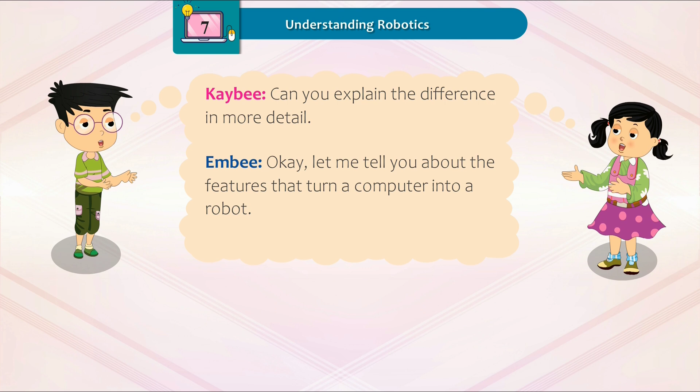In today's world, technology gives us numerous opportunities to shape our lives in various ways that lead to comfort, convenience, and efficiency. The concept of robots comes into the picture when we start using the power of technology to replace humans, especially for routine and difficult tasks. A robot is a mechanical device that is controlled by computer programs to carry out various functions. So a robot is an automated device that functions much like humans.

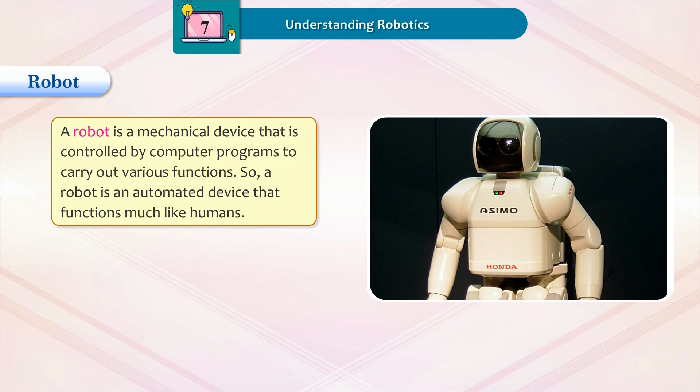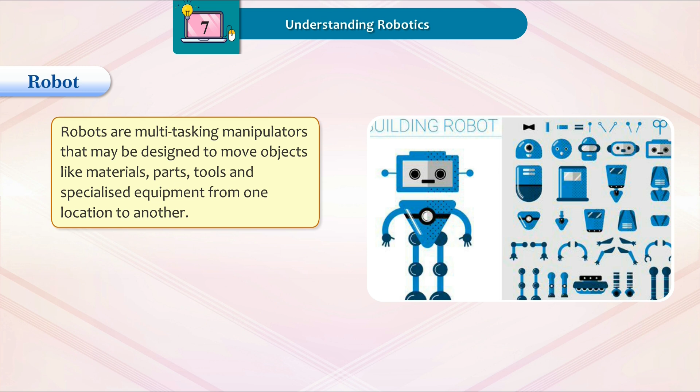Robots are multitasking manipulators that may be designed to move objects like materials, parts, tools, and specialized equipment from one location to another. Robots are machines that can be used to do jobs. Each robot has a different level of autonomy. Some robots can do work by themselves; other robots always need to be controlled by humans.

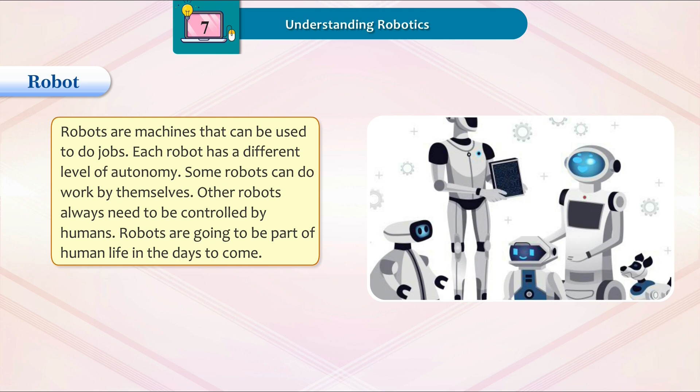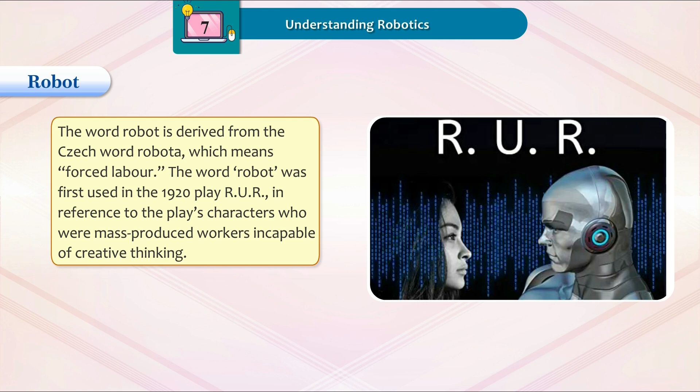Robots are going to be part of human life in the days to come. The word robot is derived from the Czech word robota, which means forced labor. The word robot was first used in the 1920 play R.U.R., in reference to the play's characters who were mass-produced workers incapable of creative thinking.

Smart Connect: The father of robotics is said to be Ismail al-Jazari.

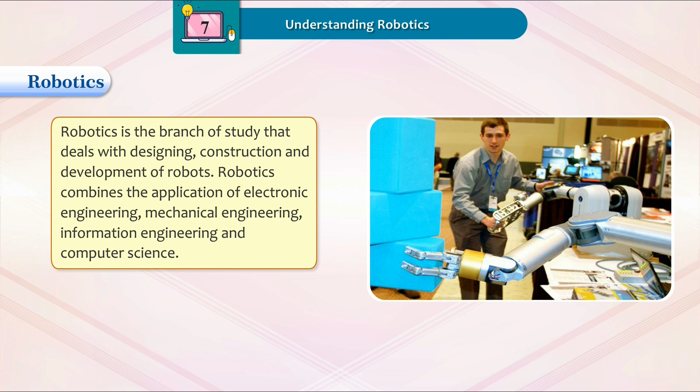Robotics is the branch of study that deals with designing, construction, and development of robots. Robotics combines the application of electronic engineering, mechanical engineering, information engineering, and computer science. Robotics is STEM, that is a combined application of science, technology, engineering, and mathematics.

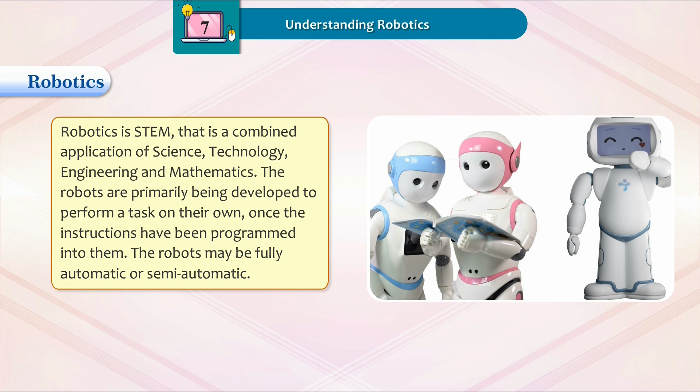The robots are primarily being developed to perform a task on their own. Once the instructions have been programmed into them, the robots may be fully automatic or semi-automatic.

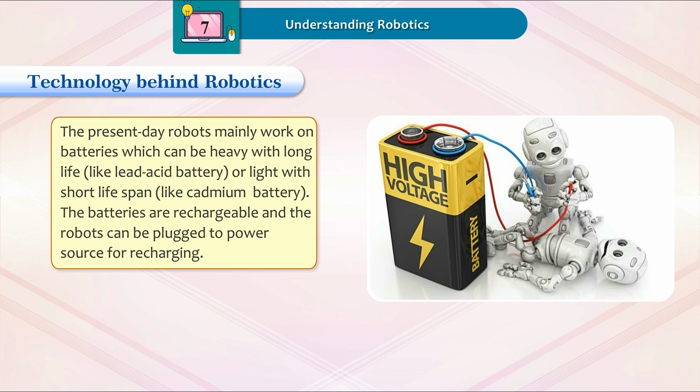Technology behind robotics: The present-day robots mainly work on batteries which can be heavy with long life, like lead-acid battery, or light with short lifespan, like cadmium battery. The batteries are rechargeable and the robots can be plugged to a power source for recharging.

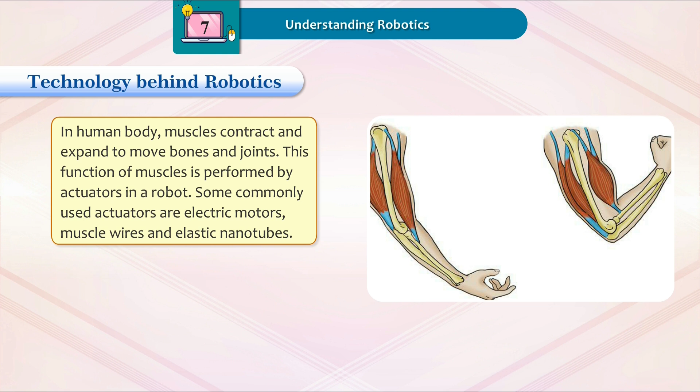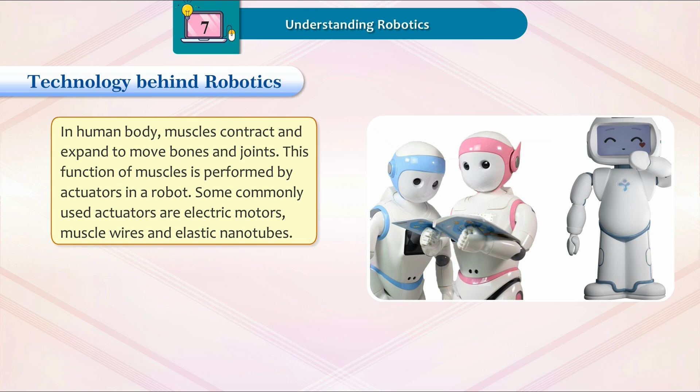In the human body, muscles contract and expand to move bones and joints. This function of muscles is performed by actuators in a robot. Some commonly used actuators are electric motors, muscle wires, and elastic nanotubes.

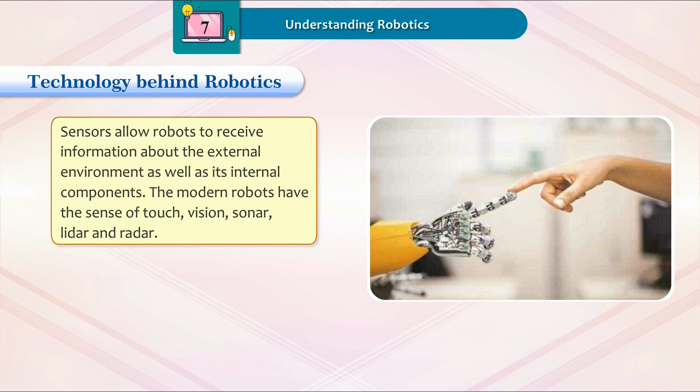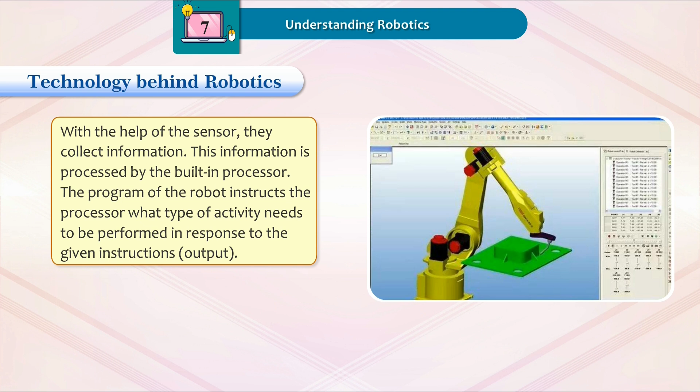Sensors allow robots to receive information about the external environment as well as its internal components. The modern robots have the sense of touch, vision, sonar, lidar, and radar. With the help of the sensor, they collect information. This information is processed by the built-in processor. The program of the robot instructs the processor what type of activity needs to be performed in response to the given instructions or output.

Applications of robotics: Presently, the robots are being developed to perform a specific set of activities. As a result, various customized robots have been developed.

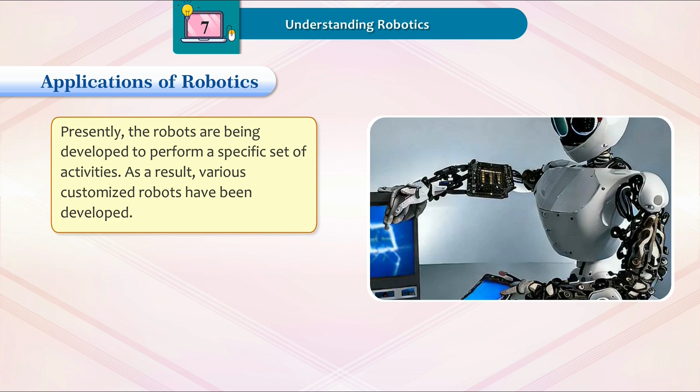Robotics in medicine: In medicine, the robots are used for various activities. Surgical robots are used for performing complex surgeries controlled by a surgeon. Companion robots are used for providing nursing facilities to patients. Disinfection robots are used for disinfecting a particular area using ultraviolet light in a short time, particularly to combat with microbes like the Ebola virus, etc.

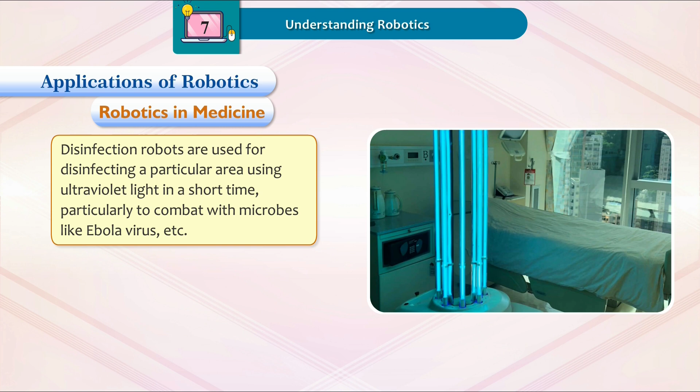Robotics in automobile manufacture: In the automotive industry, the robots are used for assembling various parts of an automobile. They reduce the use of human labor and can lift and move heavy parts with ease.

Robotics in banking: The robots are used for automation of various banking processes, document compliance, and reviewing financial documents.

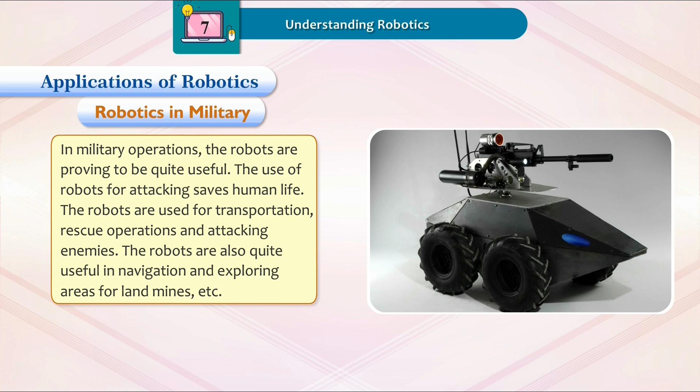Robotics in military: In military operations, the robots are proving to be quite useful. The use of robots for attacking saves human life. The robots are used for transportation, rescue operations, and attacking enemies. The robots are also quite useful in navigation and exploring areas for landmines, etc.

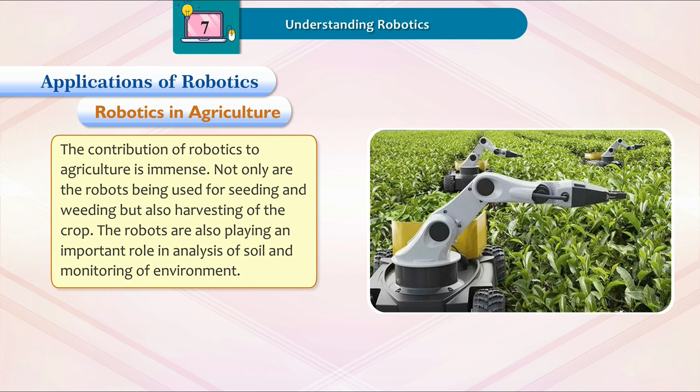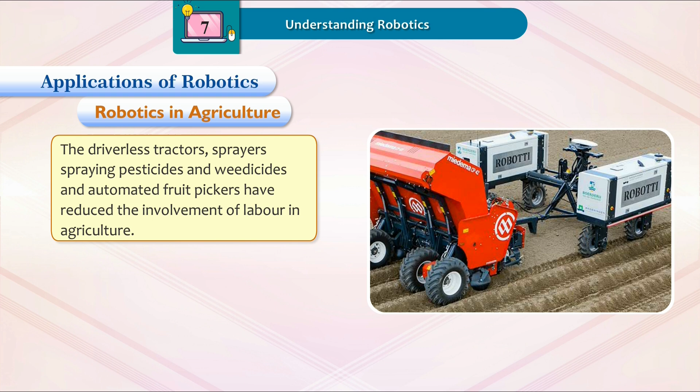Robotics in agriculture: The contribution of robotics to agriculture is immense. Not only are the robots being used for seeding and weeding, but also harvesting of the crop. The robots are also playing an important role in analysis of soil and monitoring of environment. The driverless tractors, sprayers spraying pesticides and weedicides, and automated fruit pickers have reduced the involvement of labor in agriculture.

Robotics in teaching: The robots are also replacing human teachers due to their advanced calculating and analyzing skills, as well as the huge data that can be stored in their memory.

Smart Connect: The robots that look like humans are called humanoids. Renowned robots: various robots have been developed till date.

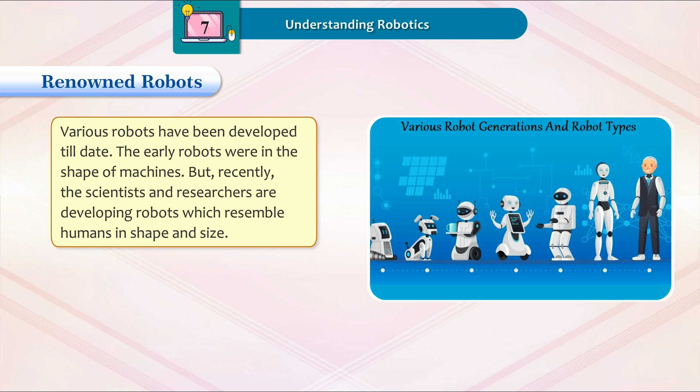The early robots were in the shape of machines, but recently scientists and researchers are developing robots which resemble humans in shape and size. Some robots that have gained immense popularity are WooWee CHiP.

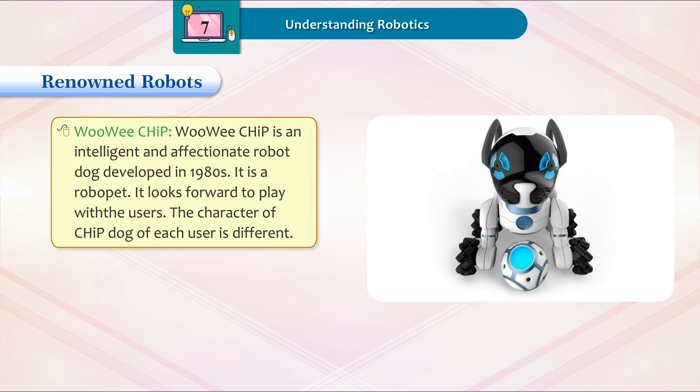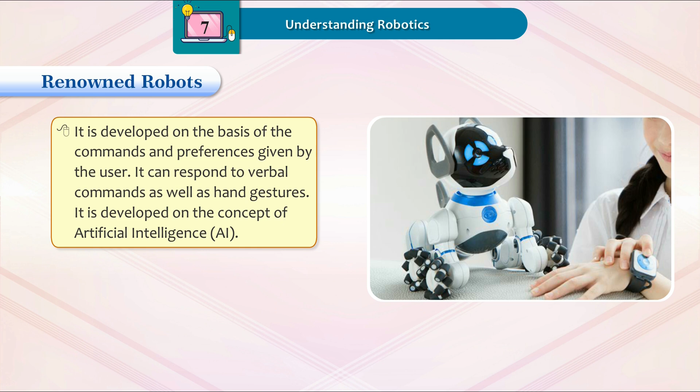WooWee CHiP is an intelligent and affectionate robot dog developed in the 1980s. It is a robo-pet that looks forward to playing with users. The character of CHiP for each user is different, developed based on the commands and preferences given by the user. It can respond to verbal commands as well as hand gestures, and is developed on the concept of artificial intelligence.

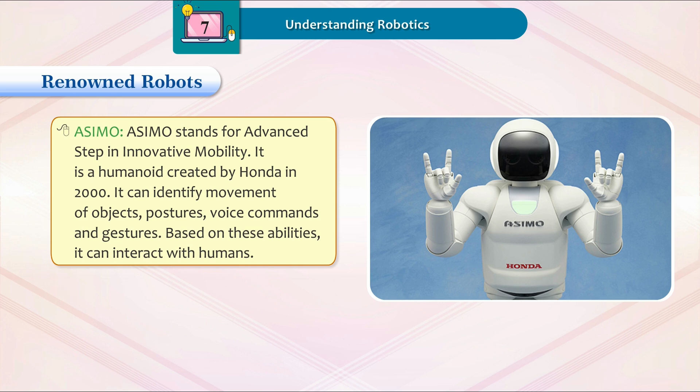ASIMO stands for Advanced Step in Innovative Mobility. It is a humanoid created by Honda in 2000. It can identify movement of objects, postures, voice commands, and gestures, and based on these abilities, it can interact with humans.

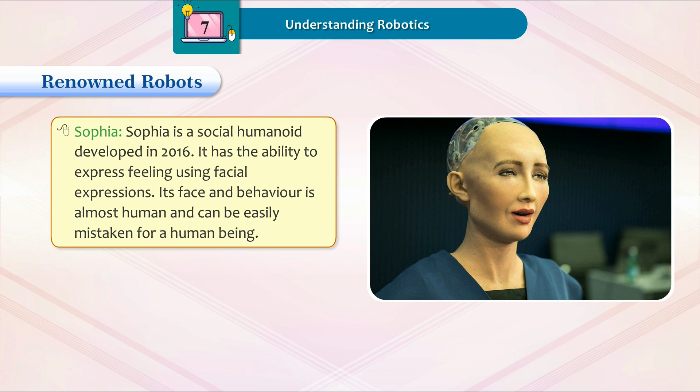Sophia is a social humanoid developed in 2016. It has the ability to express feeling using facial expressions. Its face and behavior is almost human and can be easily mistaken for a human being. Sophia was developed to provide nursing service to the elderly and help manage crowds at parks. It has 9 siblings as well to help it.

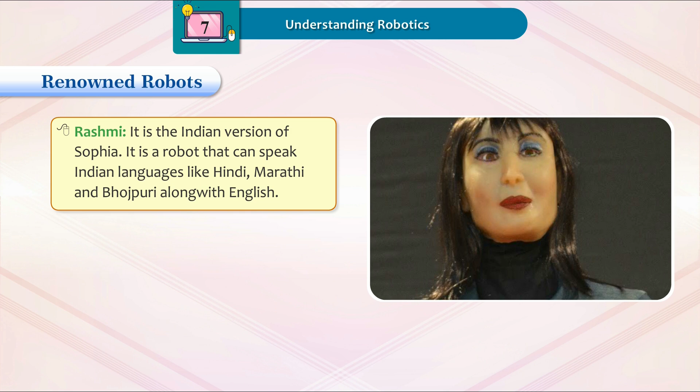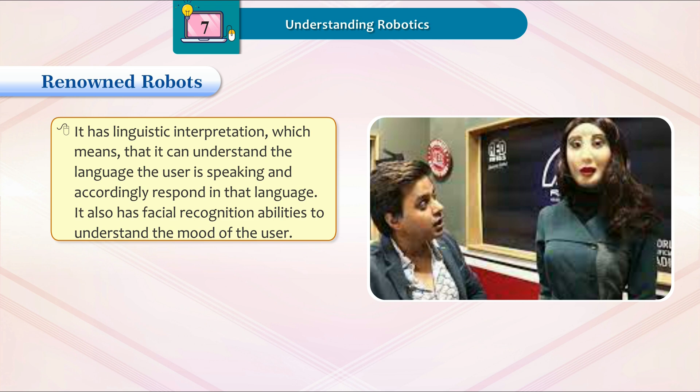Rashmi is the Indian version of Sophia. It is a robot that can speak Indian languages like Hindi, Marathi, and Bhojpuri along with English. It has linguistic interpretation, meaning it can understand the language the user is speaking and respond in that language. It also has facial recognition abilities to understand the mood of the user.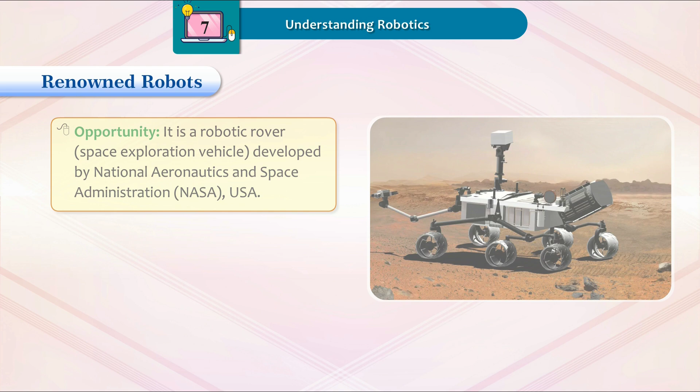Opportunity is a robotic rover space exploration vehicle developed by NASA, USA. NASA sent this rover for exploration of the planet Mars. It actively provided useful information about Mars from 2004 to 2018.

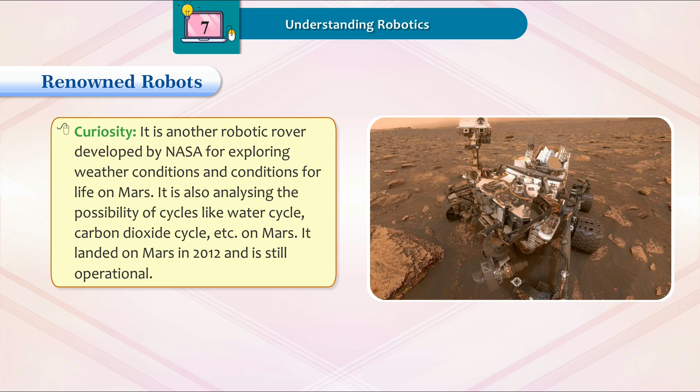Curiosity is another robotic rover developed by NASA for exploring weather conditions and conditions for life on Mars. It is also analyzing the possibility of cycles like the water cycle and carbon dioxide cycle on Mars. It landed on Mars in 2012 and is still operational.

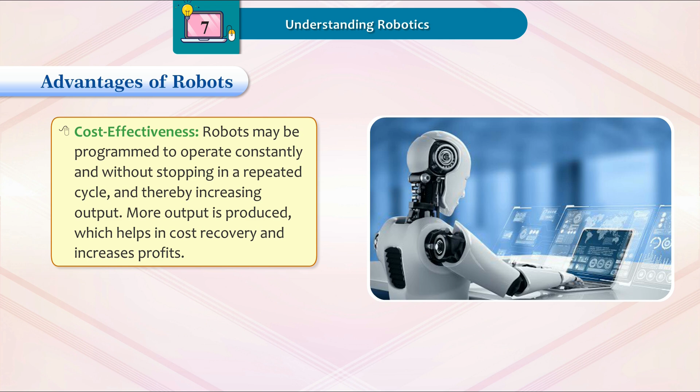Advantages of robots: cost effectiveness. Robots may be programmed to operate constantly and without stopping in a repeated cycle, thereby increasing output. More output is produced, which helps in cost recovery and increases profits.

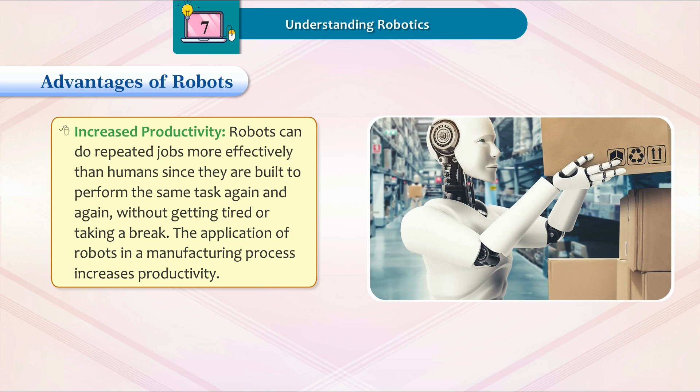Increased productivity. Robots can do repeated jobs more effectively than humans since they are built to perform the same task again and again without getting tired or taking a break. The application of robots in a manufacturing process increases productivity.

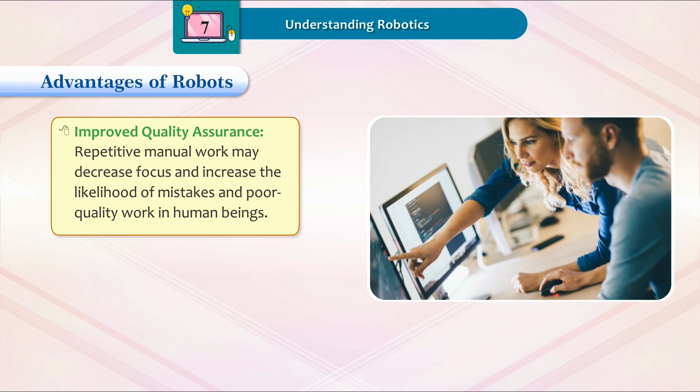Improved quality assurance. Repetitive manual work may decrease focus and increase the likelihood of mistakes and poor quality work in human beings. Robots avoid these risks by manufacturing and inspecting goods by predetermined standards. More precise and consistently high-quality products help businesses grow and expand.

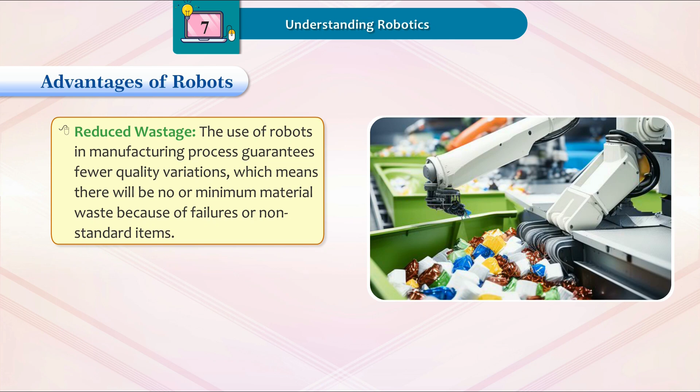Reduced wastage. The use of robots in manufacturing guarantees fewer quality variations, meaning there will be no or minimum material waste because of failures or non-standard items.

Consistency. Robots can do the same repetitive tasks with the same precision over an extended time after being programmed, ensuring consistency in the manufacturing workflow and output.

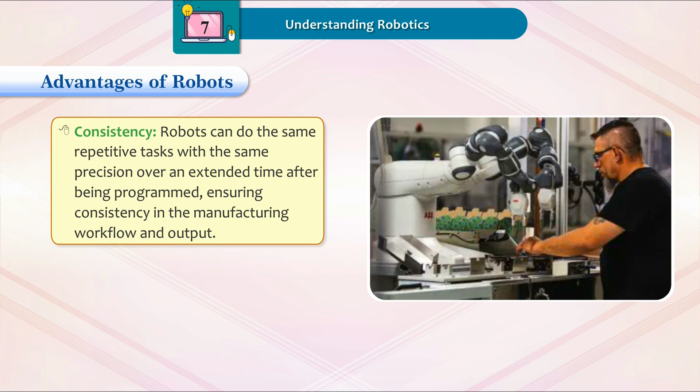Motivated workforce. The implementation of robots frees workers from tedious, monotonous work and enables management to reassign them to other activities that allow them to develop their abilities. The overall environment improves, resulting in overall benefit to the company.

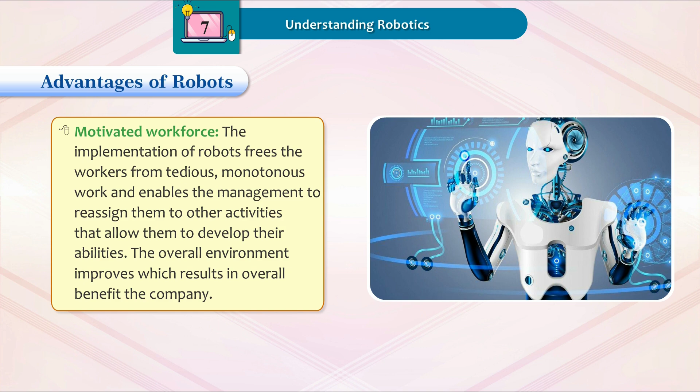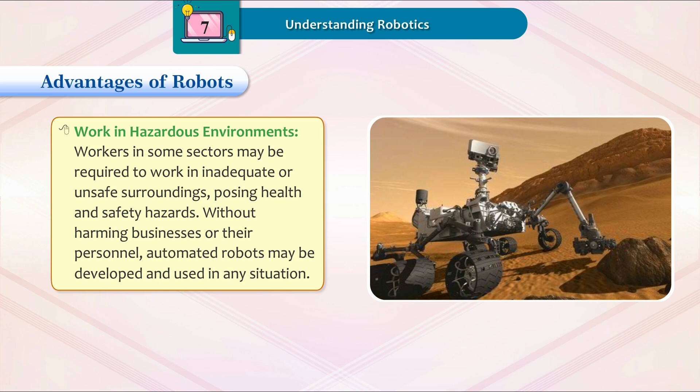Work in hazardous environments. Workers in some sectors may be required to work in inadequate or unsafe surroundings, posing health and safety hazards. Without harming businesses or their personnel, automated robots may be developed and used in any situation. Robots can endure a hostile environment of interplanetary space.

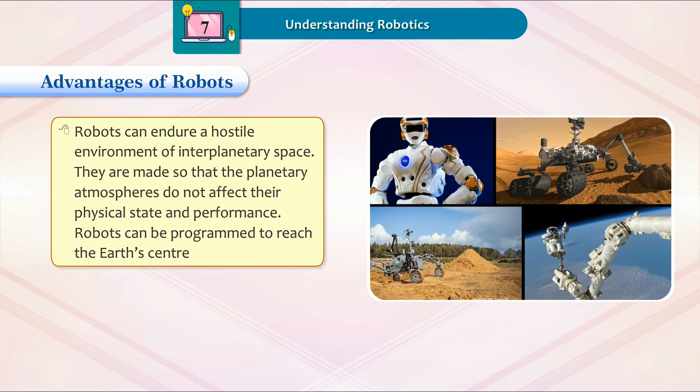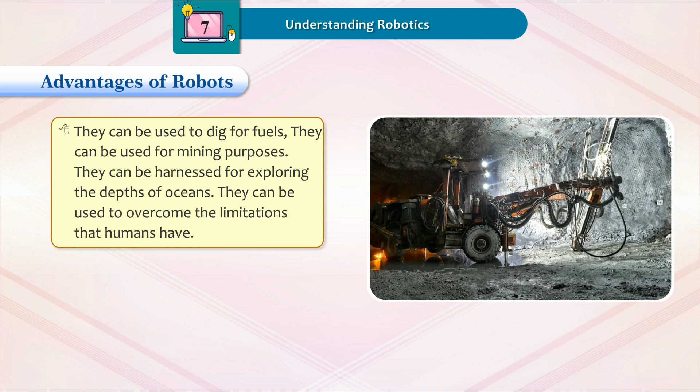They are made so that planetary atmospheres do not affect their physical state and performance. Robots can be programmed to reach the Earth's center. They can be used to dig for fuels and for mining purposes. They can be harnessed for exploring the depths of oceans, and used to overcome the limitations that humans have.

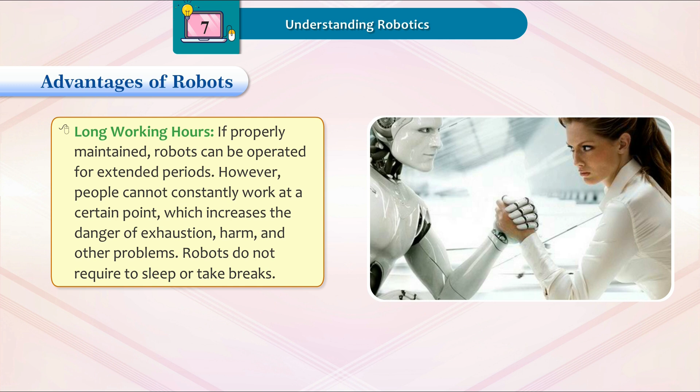Long working hours. If properly maintained, robots can be operated for extended periods. However, people cannot constantly work at a certain point, which increases the danger of exhaustion, harm, and other problems. Robots do not require to sleep or take breaks.

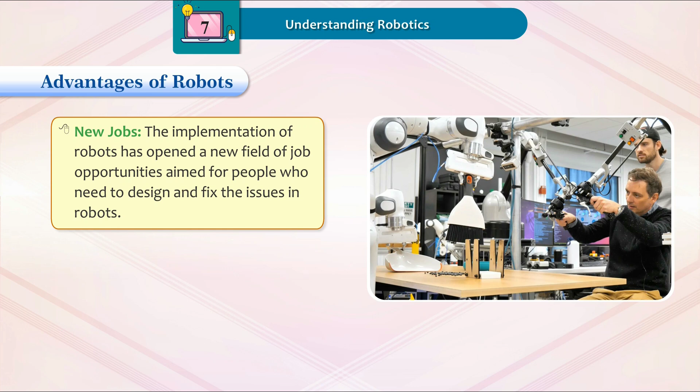New jobs. The implementation of robots has opened a new field of job opportunities aimed at people who need to design and fix the issues in robots.

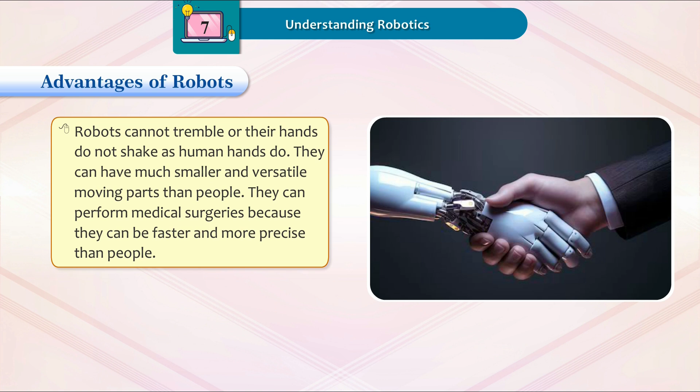Accuracy. Robots can perform precise tasks with greater consistency and accuracy than humans, eliminating the risk of errors and inconsistencies. Robots can be very accurate to fractions of an inch as needed, for example in manufacturing or microelectronics. Robots cannot tremble or have shaking hands as humans do, and they can have much smaller and versatile moving parts than people. They can perform medical surgeries because they can be faster and more precise than people.

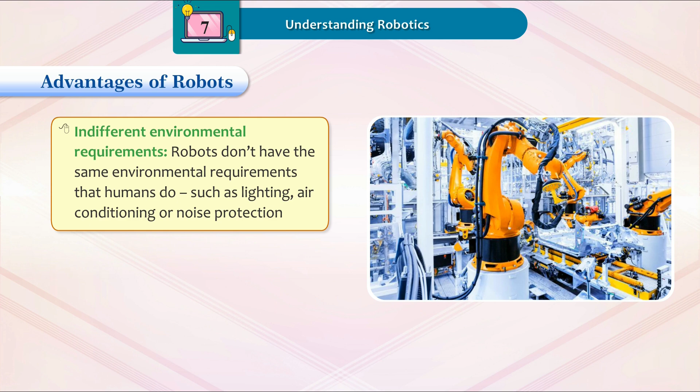Indifferent environmental requirements. Robots don't have the same environmental requirements that humans do, such as lighting, air conditioning, or noise protection. Better sensors: robots have some sensors or actuators which are more capable than humans. Disadvantages of robots: potential job losses.

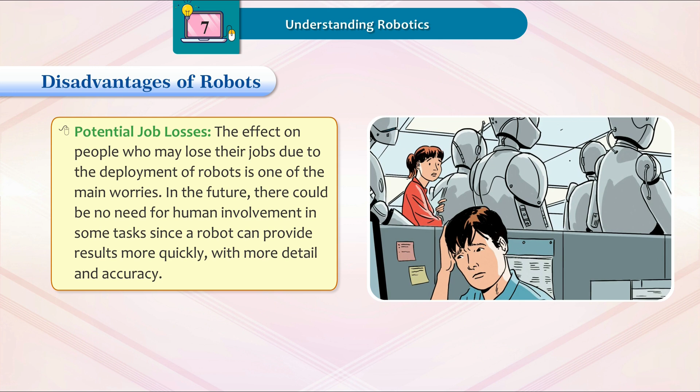The effect on people who may lose their jobs due to deployment of robots is one of the main worries. In the future, there could be no need for human involvement in some tasks since a robot can provide results more quickly with more detail and accuracy.

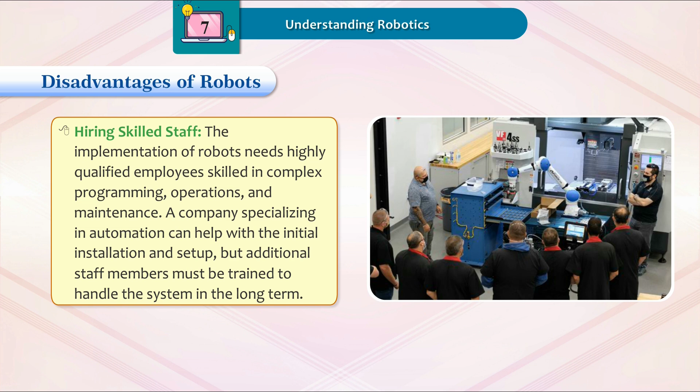Hiring skilled staff: the implementation of robots needs highly qualified employees skilled in complex programming, operations, and maintenance. A company specializing in automation can help with the initial installation and setup, but additional staff members must be trained to handle the system in the long term.

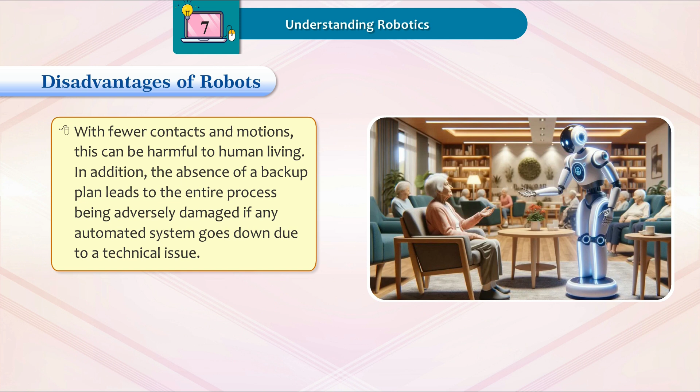Overdependence on technology: people may become dependent on this technology as robots play a significant role in our everyday lives, which might lead to adding more functions to simplify our lives. With fewer contacts and motions, this can be harmful to human living. In addition, the absence of a backup plan leads to the entire process being adversely damaged if any automated system goes down due to a technical issue.

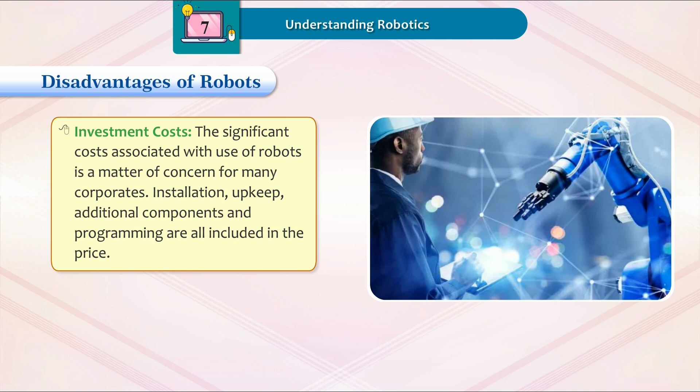Investment costs: the significant cost associated with the use of robots is a matter of concern for many corporates. Installation, upkeep, additional components, and programming are all included in the price.

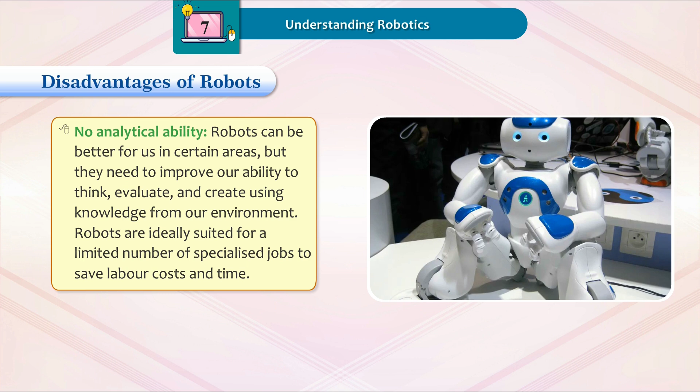No analytical ability: robots can be better for us in certain areas, but they need to improve our ability to think, evaluate, and create using knowledge from our environment. Robots are ideally suited for a limited number of specialized jobs to save labor costs and time. They are reliant on people because they program them for particular jobs. The use of robots remains constrained despite the substantial advancements made by artificial intelligence and machine learning.

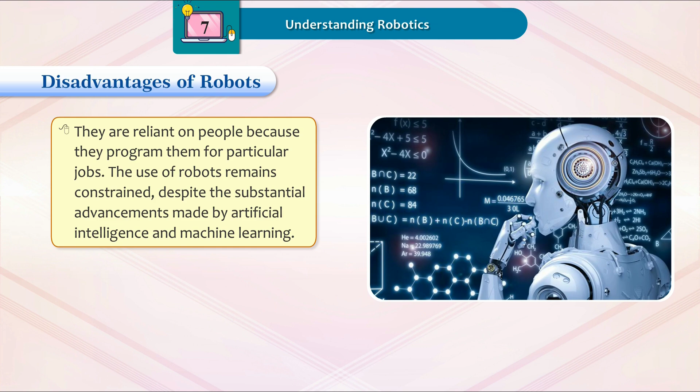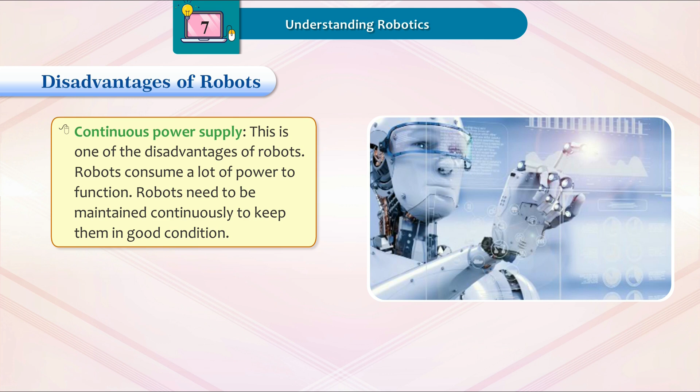Continuous power supply: this is one of the disadvantages of robots. Robots consume a lot of power to function and need to be maintained continuously to keep them in good condition. A huge amount of money needs to be kept aside for operation and running of robots. The program needed to make it function as per user needs costs even more.

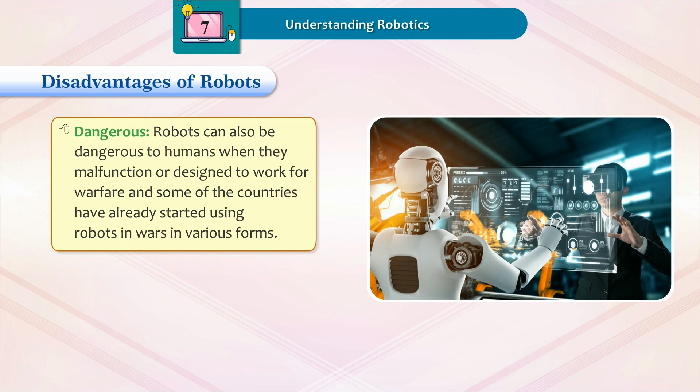Dangerous: robots can also be dangerous to humans when they malfunction or are designed to work for warfare, and some countries have already started using robots in wars in various forms.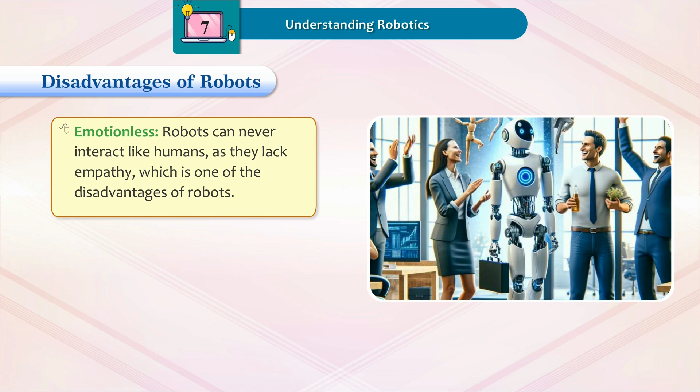Emotionless: robots can never interact like humans as they lack empathy, which is one of the disadvantages of robots. Security risks: there is always a risk of robotic devices getting hacked or hijacked, especially if they are being used for defense and security purposes.

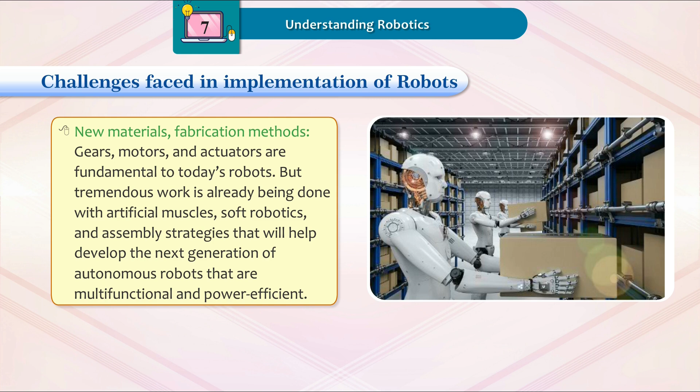Challenges faced in implementation of robots. The implementation of robots has many challenges. Most of the challenges pertain to artificial intelligence, perception, power sources, etc. Some of the major challenges include new materials fabrication methods. Gears, motors, and actuators are fundamental to today's robots, but tremendous work is already being done with artificial muscles, soft robotics, and assembly strategies that will help develop the next generation of autonomous robots that are multifunctional and power efficient.

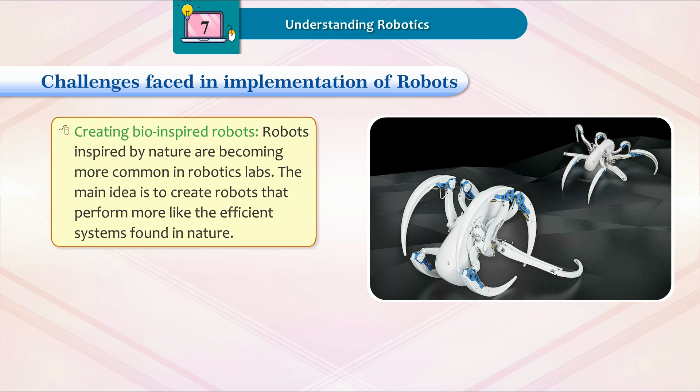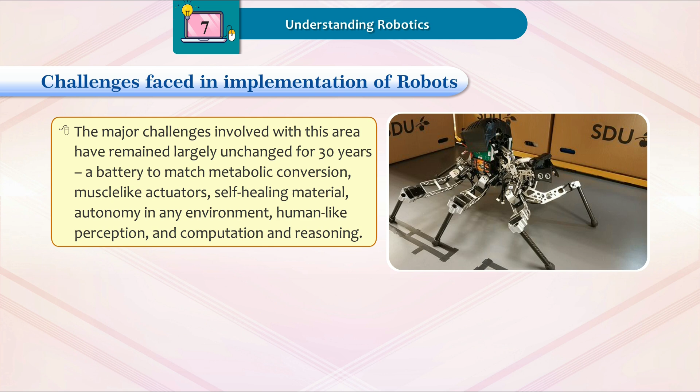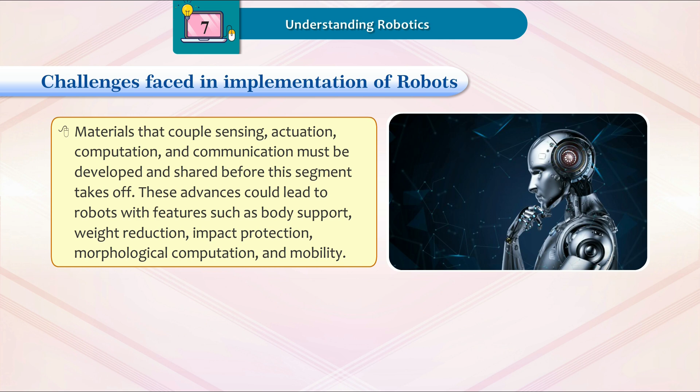Creating bio-inspired robots: robots inspired by nature are becoming more common in robotics labs. The main idea is to create robots that perform more like the efficient systems found in nature. The major challenges involved with this area have remained largely unchanged for 30 years: a battery to match metabolic conversion, muscle-like actuators, self-healing material, autonomy in any environment, human-like perception and computation and reasoning. Materials that couple sensing, actuation, computation and communication must be developed and shared before this segment takes off. These advances could lead to robots with features such as body support, weight reduction, impact protection, morphological computation and mobility.

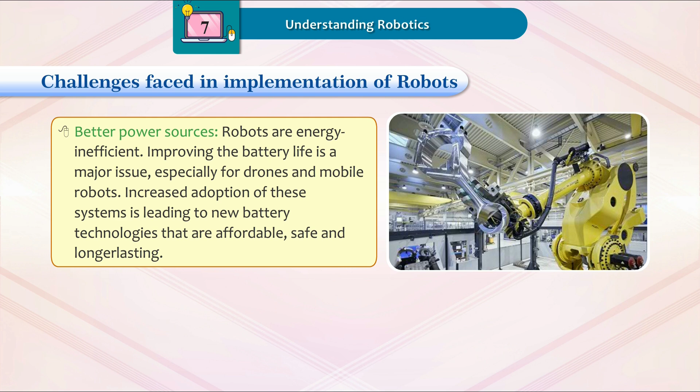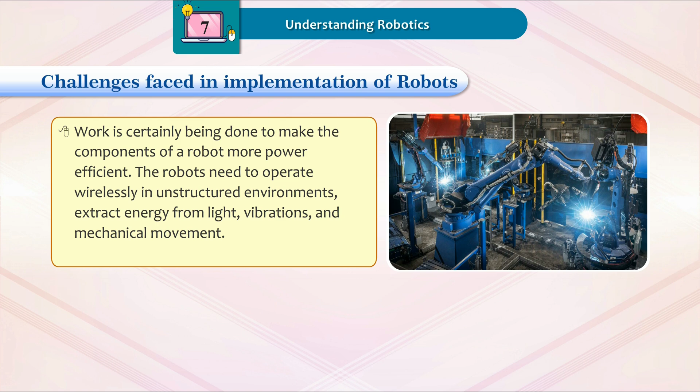Better power sources: robots are energy inefficient. Improving the battery life is a major issue, especially for drones and mobile robots. Increased adoption of these systems is leading to new battery technologies that are affordable, safe, and longer lasting. Work is certainly being done to make the components of a robot more power efficient. The robots need to operate wirelessly in unstructured environments, extract energy from light, vibrations, and mechanical movement. Research is also being done to improve battery technology beyond the nickel, metal, hydride, and lithium-ion options currently available.

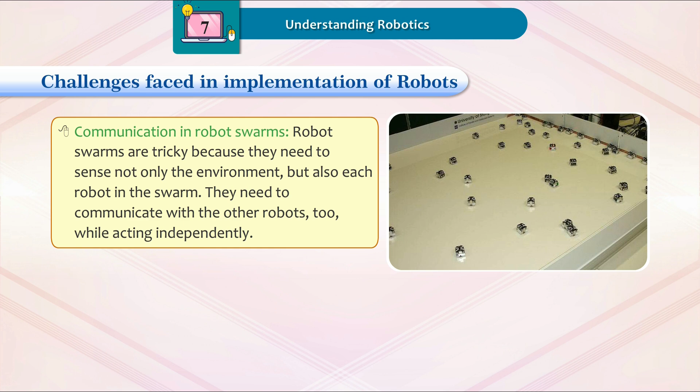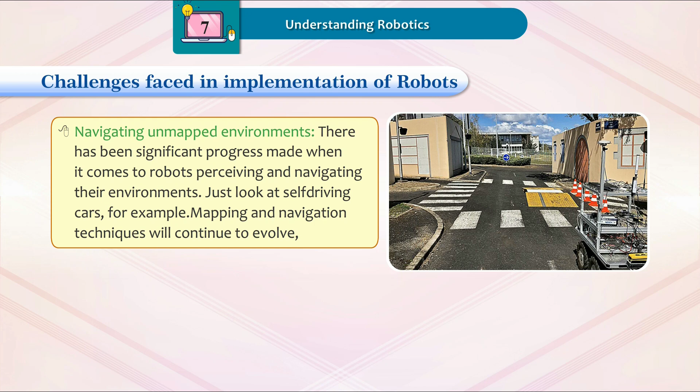Communication in robot swarms: robot swarms are tricky because they need to sense not only the environment but also each robot in the swarm. They need to communicate with the other robots too while acting independently. Navigating unmapped environments: there has been significant progress made when it comes to robots perceiving and navigating their environments. Just look at self-driving cars, for example. Mapping and navigation techniques will continue to evolve, but future robots need to be able to operate in environments that are unmapped and poorly understood.

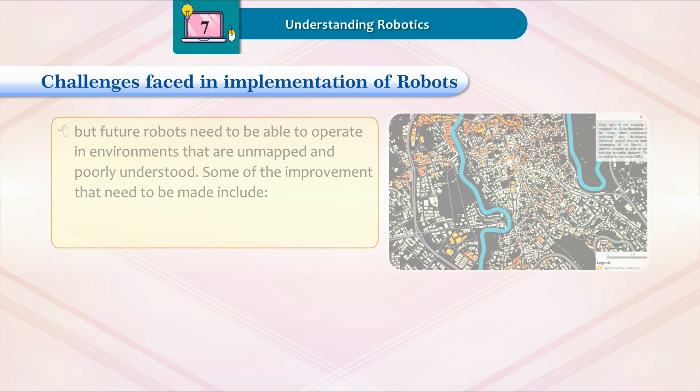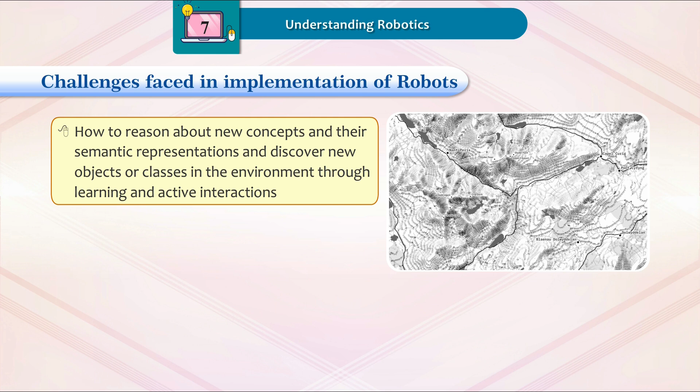Some of the improvements that need to be made include how to learn, forget, and associate memories of scenes both qualitatively and semantically, how to surpass purely geometric maps to have semantic understanding of the scene, how to reason about new concepts and their semantic representations, and discover new objects or classes in the environment through learning and active interactions.

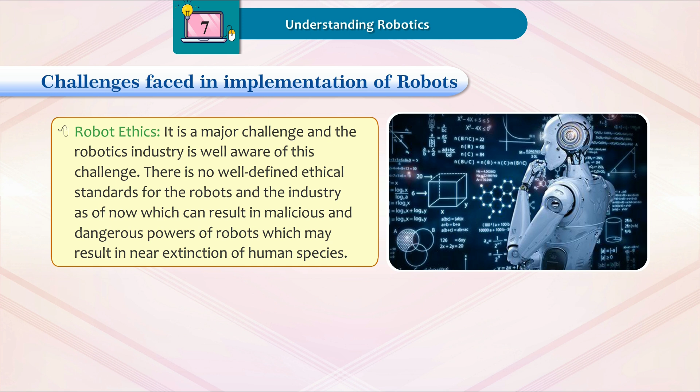Robot ethics: it is a major challenge and the robotics industry is well aware of this challenge. There is no well-defined ethical standards for the robots and the industry as of now, which can result in malicious and dangerous powers of robots, which may result in near extinction of human species.